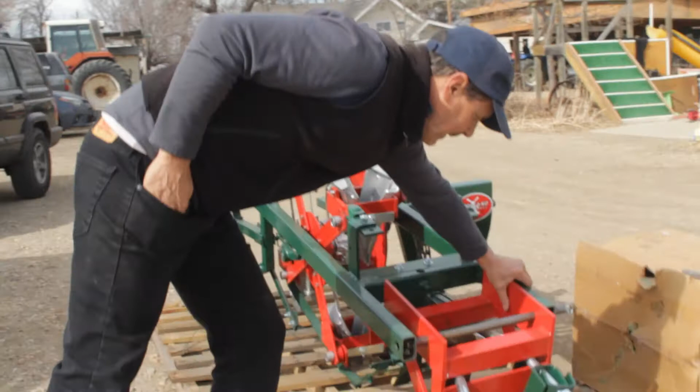Pretty simple process, we just picked it up. Leah slid the bar through for me. That's what it looks like. It's got some slop in it like this, it's got a little bit of rock to it. And as the instructions say, put in the cotter pin, farmer. We'll hook it up to the tractor and see if there's any modifications.

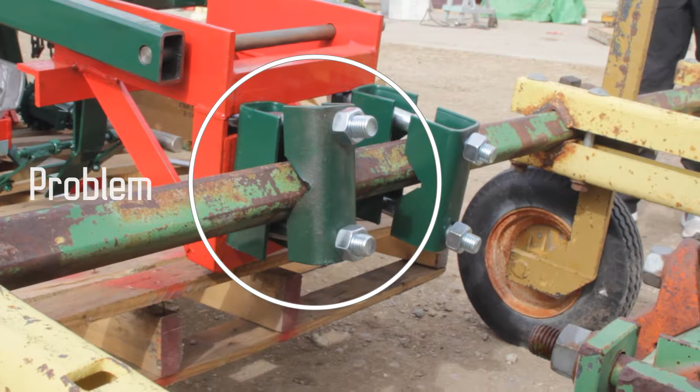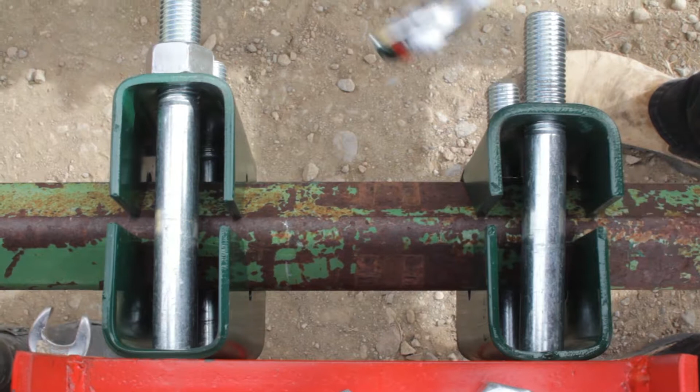This is shorter than that. That's why this one's bottoming out. It's probably upside down. Upside down? What do you mean? This is probably supposed to be up here, and it's supposed to be symmetric. Here, are you sure? Yeah. Oh, is there another piece?

Well, like all good projects, there's something always wrong. It looks like Holland shipped us 2 different clamps. So I'm gonna have to get some washers to stack it up here to take up the slack. I don't think it's any big deal, but this left side's giving us some static, so we'll get her rigged up and get her lifted up.

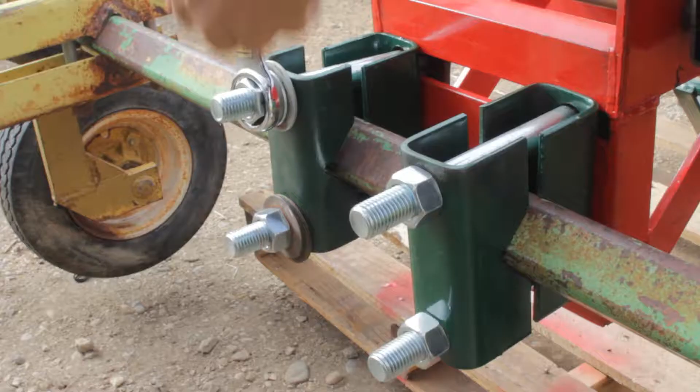Well, I found a couple of washers, got them put on the bolts and got her snug down. Now it's not tight yet, we're not going to torque it way down, but now we're going to lift it for the first time and see how it works. I'm not quite sure about this hitch, but we'll give her a go.

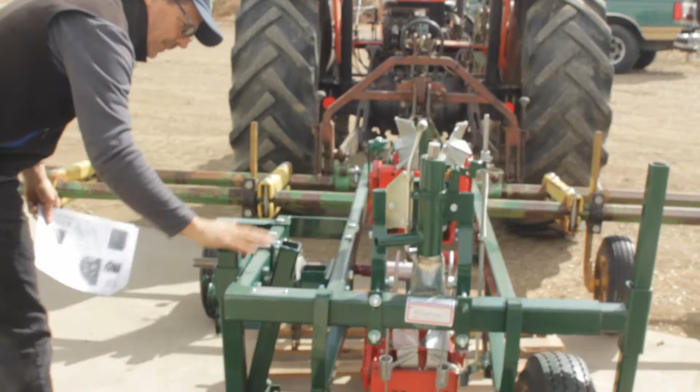Okay, step 3, rear axle drive wheel, see diagram A. Alright, that's the rear axle drive wheel. So there's 2 rectangular tubes that go into a couple of clamps, and we're going to have to pull that off. Alright, I think it's these 2 things right here, and this thing. This is some kind of drive mechanism, I guess.

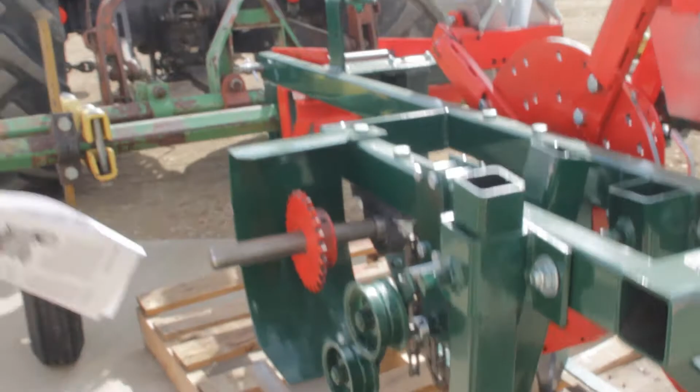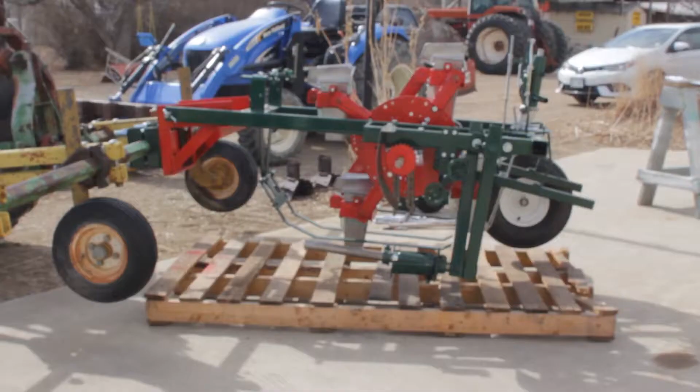Figure that out. Alright, so I'm going to start up the noisemaker and lift this thing up and get these pieces out and see if these directions play out. Remove the left rear axle from the unit frame. Yeah, so that's going to have to come out of there.

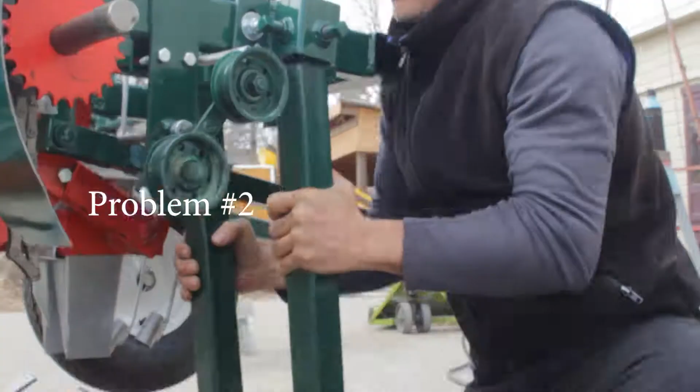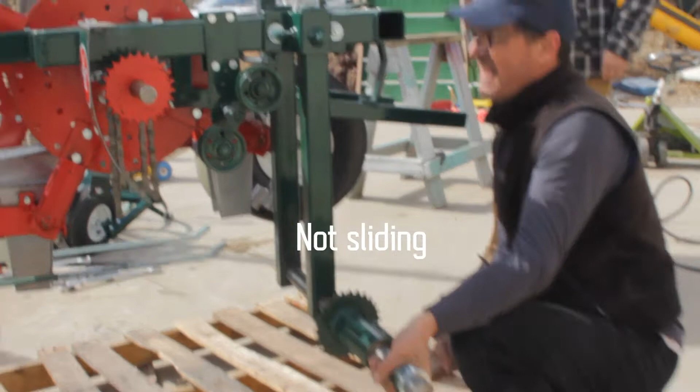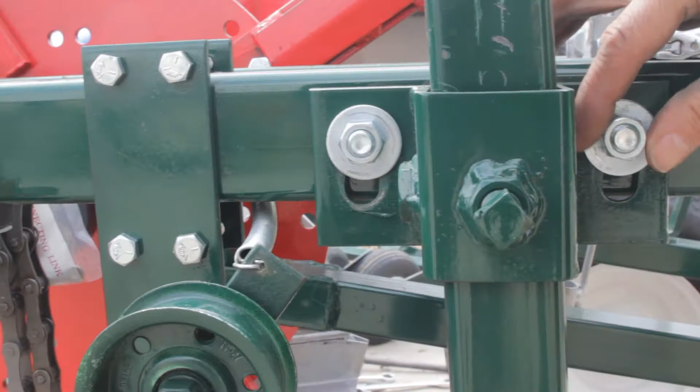Wow, yeah, slipped them in. Also figured out our dilemma with these sliding of the post through the clamps - these things are fixed to the frame with these 4 bolts. We loosen these 4 bolts, so now these sleeves can align with the orientation of the post and slide right up. So I stopped cussing Holland after I figured that out.

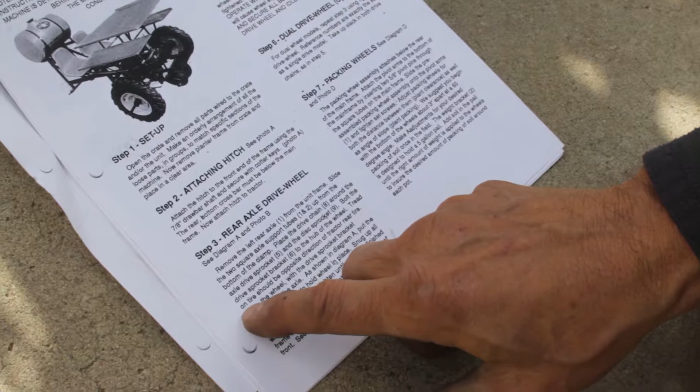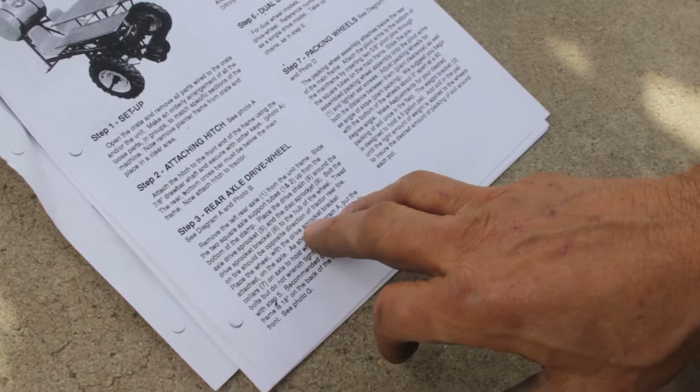Remove the rear axle, slide the 2 square axle supports, 1 and 2, up from the bottom of the clamp - pound, beat the crap out of them. Place the drive chain around the sprocket and the disc. Bolt the drive sprocket bracket 6 to the hub of the wheel. Tread on tire should be in the opposite direction of the rear tractor wheel. Place the wheel with the drive sprocket bracket attached onto the axle.

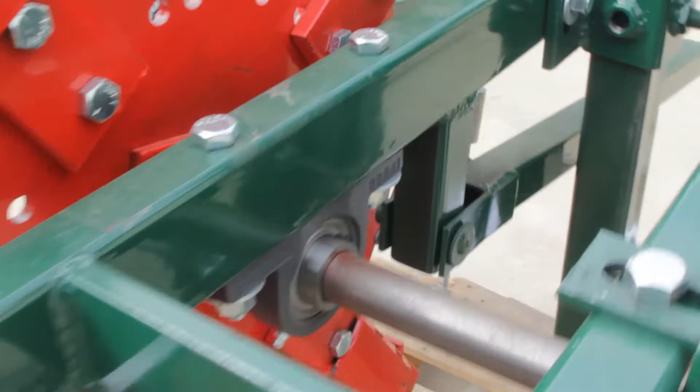Okay, so this is all this stuff right now. Alright, this must be the drive chain, and that's the master link. Deal with that later.

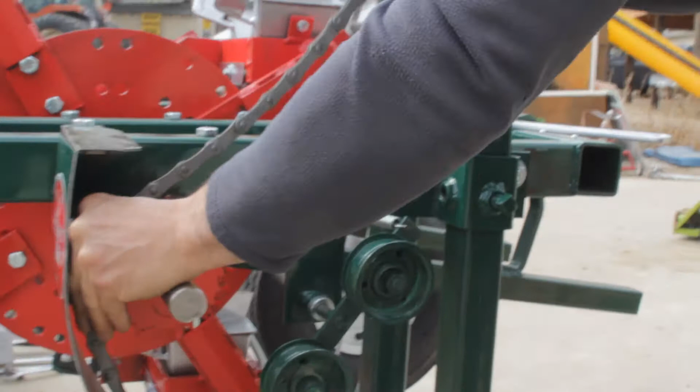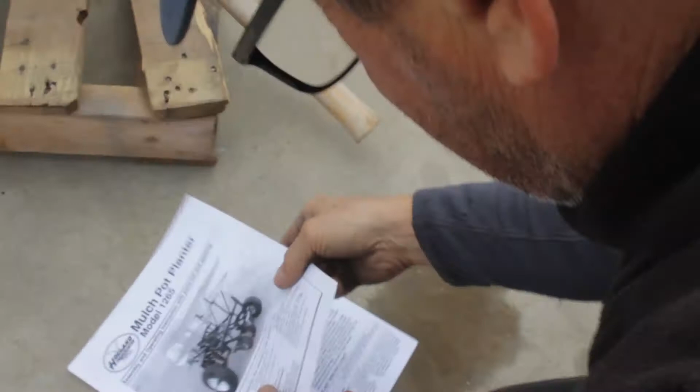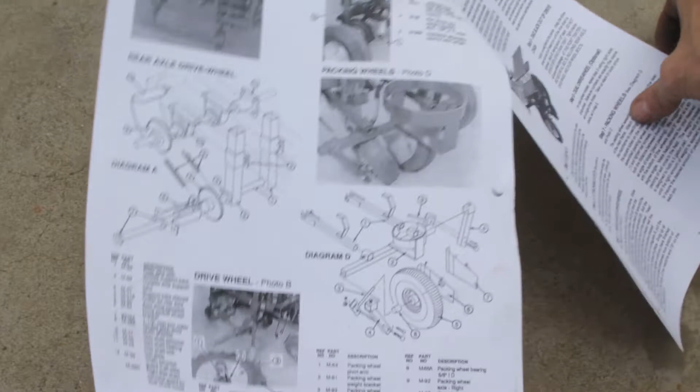This is some kind of chain tightener. It doesn't show a chain tightener in the plans here - see, it just shows a straight shot across there. It's got a lot more posts sticking up on the top than we've got, so we're gonna have to go up a long ways for it to reach through there, so we'll do a little more adjusting here. So we got the chain hooked up. This tensioner is not shown in the instructions, so I'm not quite sure.

I think the chain evidently sets the length of all of this and this angle, and this is what we ended up with. This is the combination that got us around this. I'll probably end up taking this tensioner around it after I get everything secured down, but I'll just take this off and thread it through.

And I think that's the way it's designed with these collars. You loosen that, slide it out, rotate it, bring it back, and let it hold the tension in the chain. But I think this sets the height. So I'm going to go ahead and snug these all down and start working on that wheel.

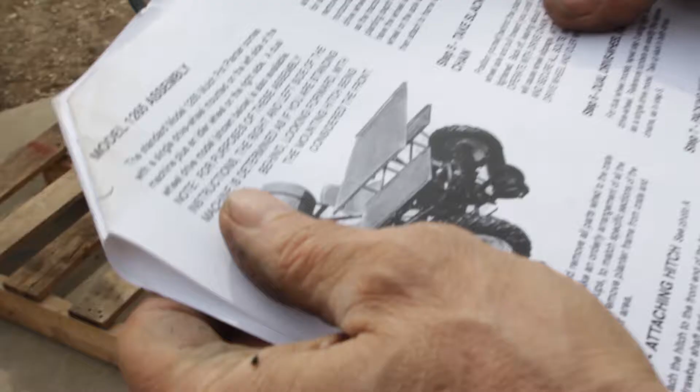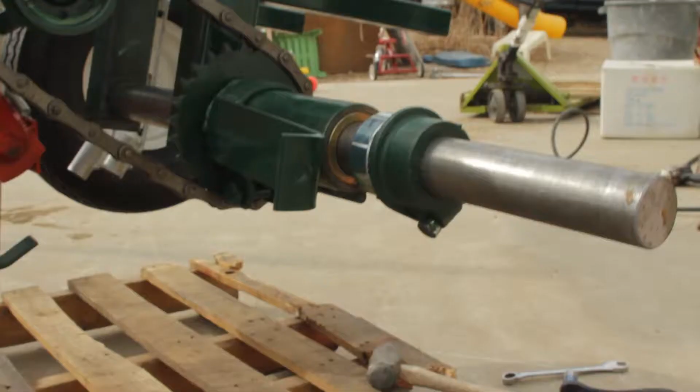Now, where this is on the axle, I've just got it centered up with the center line of my tire, and that seems to be appropriate. That seems a little canted though, doesn't it?

I think we're going to have to do some cattywampus adjustment here. See how it's kind of toed out there? We'll have to adjust these bars with these pieces and get it kind of lined up. But I think in principle it's pretty well lined up, so it'll be driving right in the tire pack. So I'm just going to go ahead and tighten this tire down where it is.

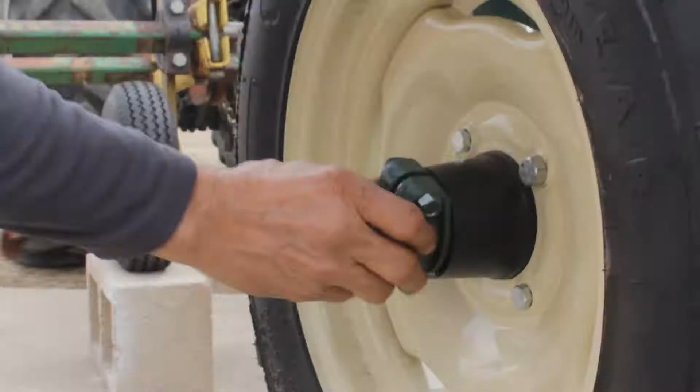Yeah, how about that? And then you drop the plan in.

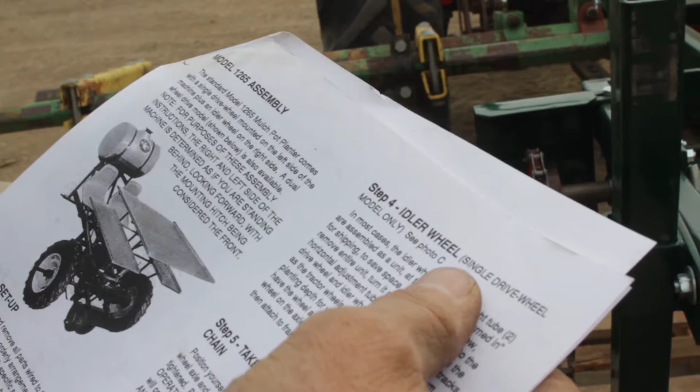Alright, idler wheel. I don't have an... let's see, idler wheel, single drive wheel model, see photo C. So I've got that idler wheel over there. In most cases, the idler wheel and the upright tube are assembled as a unit at the factory.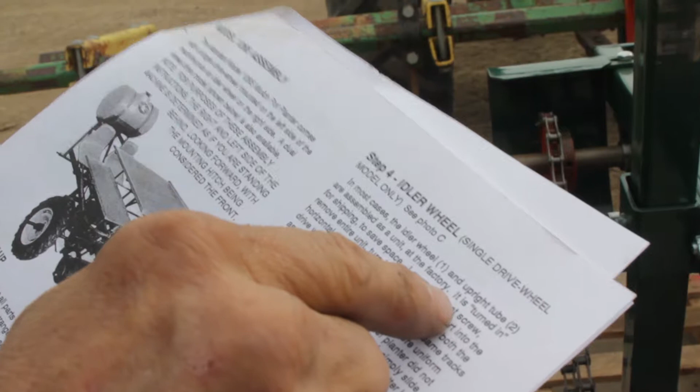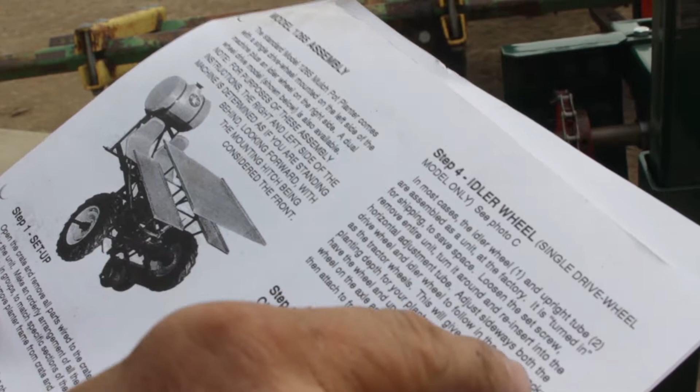It is turned in for shipping to save space. Loosen the set screw, remove the entire unit, turn it around and reinsert it into the horizontal. Adjust sideways on both to follow the same tracks as the tractor. Yeah, that's right. Okay, got that part.

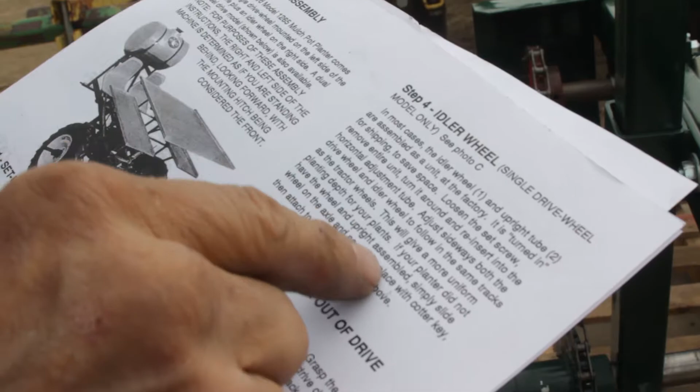This will give you a more uniform planting depth if your planter did not have... okay. Alright, I don't know if that's the right height or not, but close enough for now.

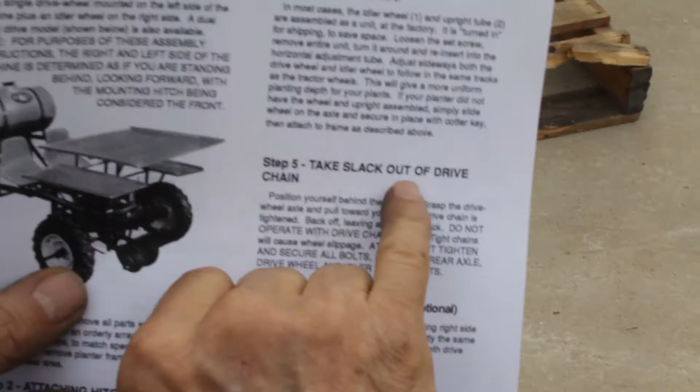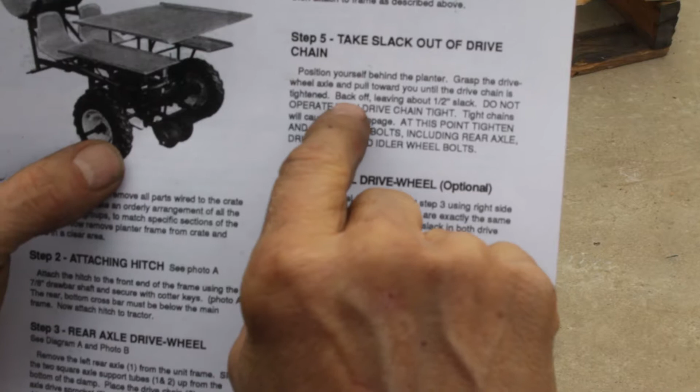Take slack out of drive chain. Position yourself behind the planter. Grasp the drive wheel axle and pull toward you until the drive chain is tightened. Back off about a half inch of slack. Do not over tighten the chain. Over tightening chains will cause wheel slippage.

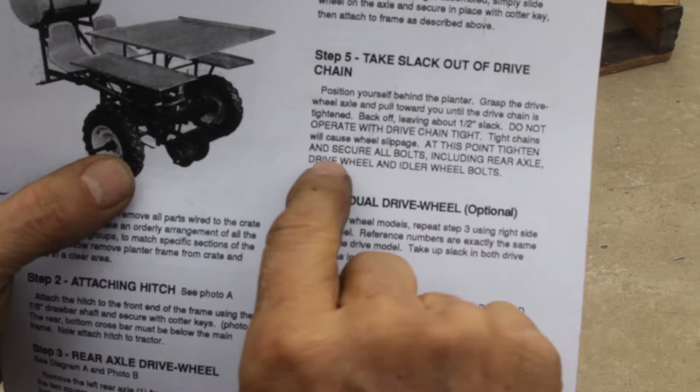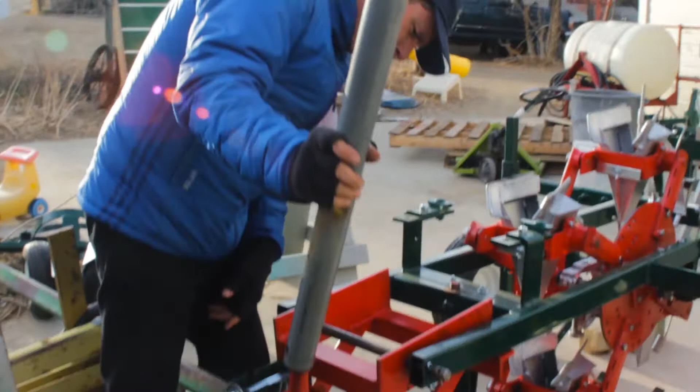But so back here we had trouble getting the chain tight and keeping the wheel aligned. It was kind of toeing out a little bit, which is a little bit concerning. So let me come back here and show you what I did to, I think, prevent that toe-out issue that we were having.

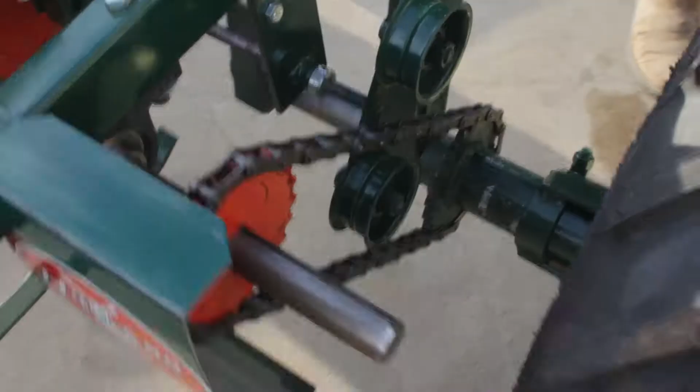Okay, the instructions say, let's keep about a half inch of slack in there. So I think that's probably what they mean by a half inch of slack. The other thing I noticed is that...

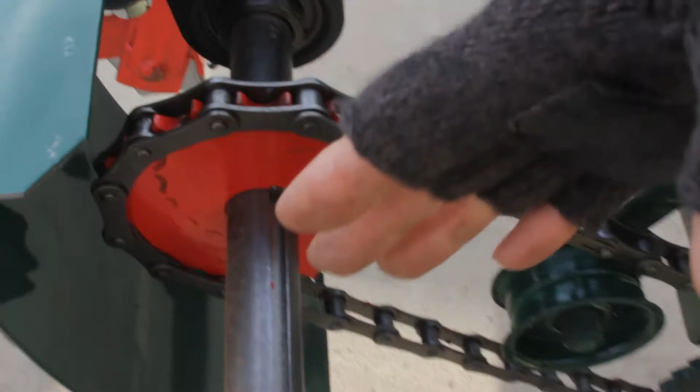...translate on this axis, and I think the axle, I'm going to move it out a little bit, and then move this out a little bit too, because it's tight in against there, and I don't have any slack. So we'll make those adjustments off camera.

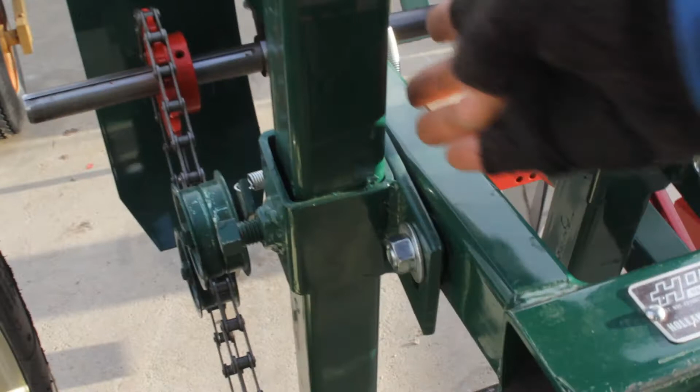But one of the things that was happening is when I tightened these clamps down, I was drawing everything in.

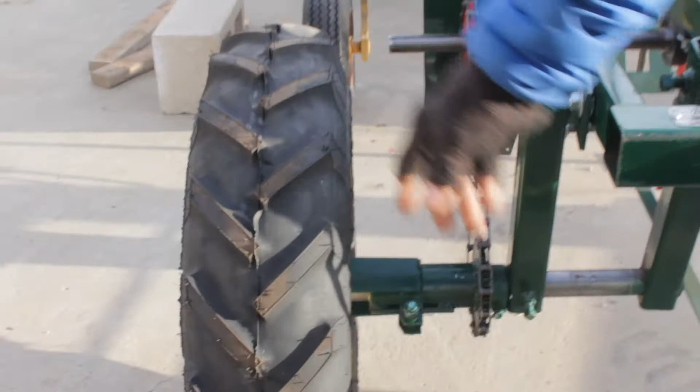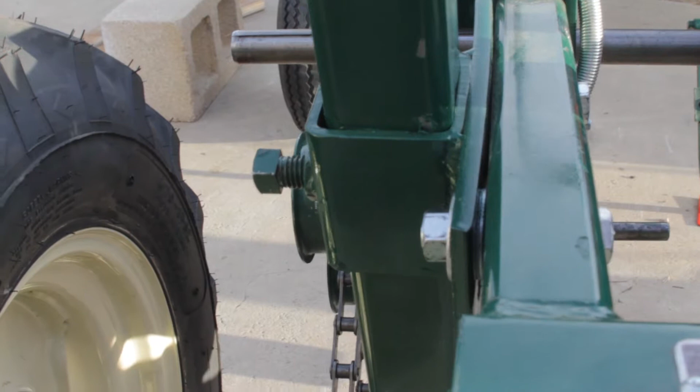So now if you sight down, it looks pretty straight. If you look at these flat bars here, they look a little bent to begin with, and I don't know if that was by design. Maybe my spacers will end up coming out, but right now that's the way it looks, and everything's tight and holding together.

It's going to finish torquing down these bolts in the front, and we'll get on to packing wheel install, step 7.

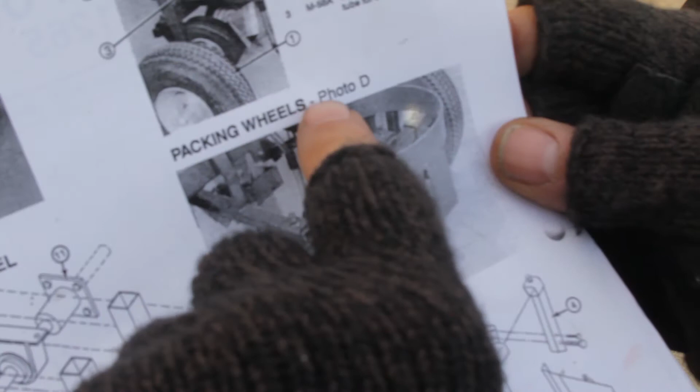Packing wheels, photo D. Okay, diagram D. Okay, packing wheel, see diagram D info.

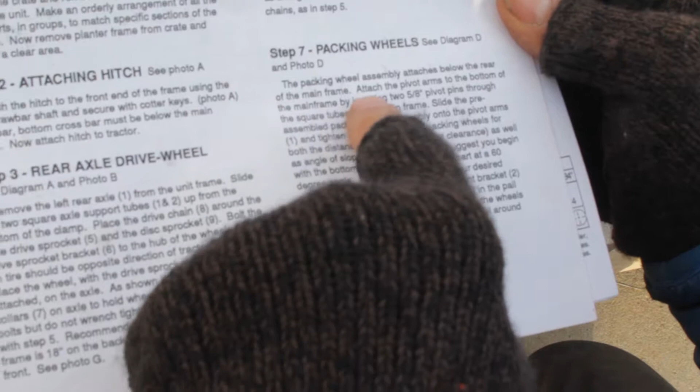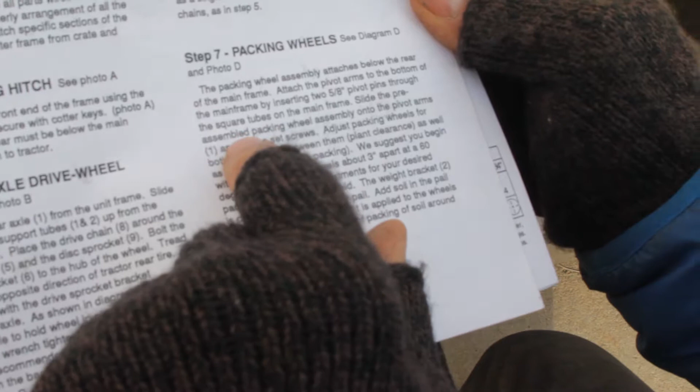The packing wheel assembly attaches below the rear of the main frame. Attach the pivot arms to the bottom of the main frame by inserting two 5/8 pivot pins through the square tube on the main frame. Slide the pre-assembled packing wheel assembly onto the pivot arms and tighten set screws.

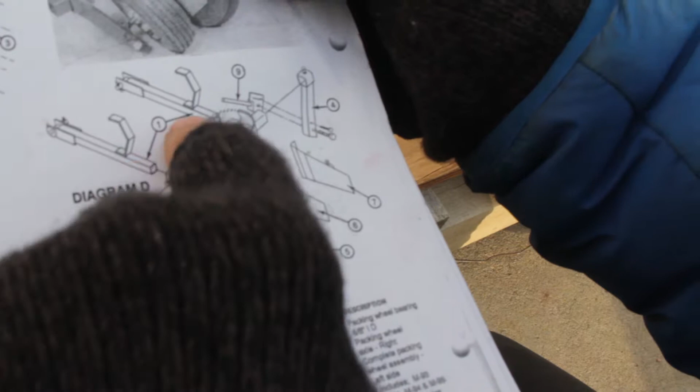All right, I think I know these right there. Okay, those two things are right here, independent. Adjust the packing wheels for both distance between them and plant clearance, as well as the angle of slope.

For plant packing, we suggest that you begin with the bottom of the wheels about 3 inches apart. I think that's about right. At about a 60-degree angle. Make the adjustments for your desired packing soil once in the field.

The weight bracket, this thing, we'll put a 5-gallon pail in there. Add soil in the pail until the right amount of weight is applied to the wheels to ensure the desired amount of packing soil around each plant.

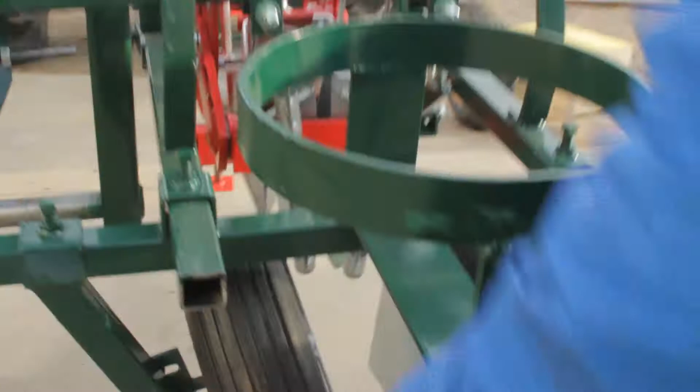So I think this is sort of a real-time adjustment that we'll do. So I'm just going to go ahead and cinch this down so it won't go anywhere. Let me run and get my crescent wrench.

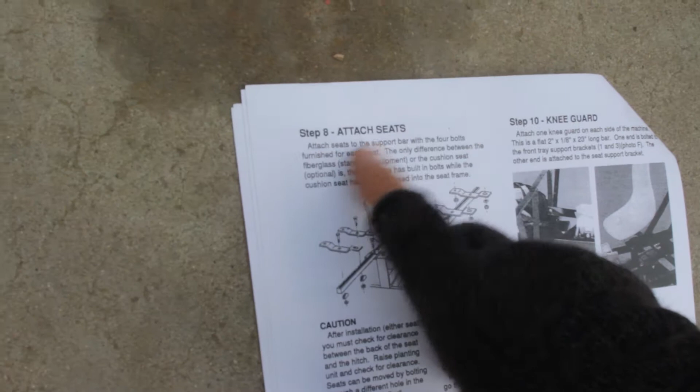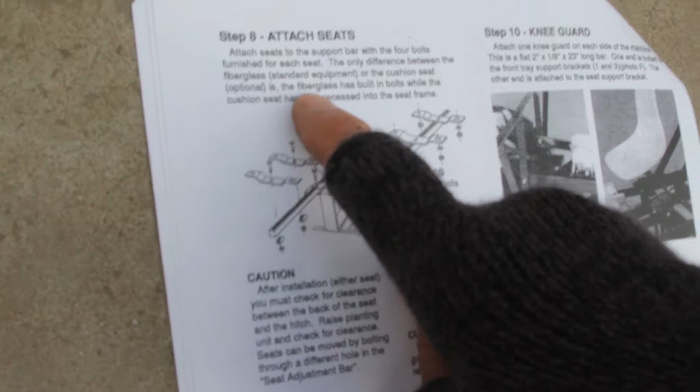Attach the seats. Step 8: attach the seats to the support bar with 4 bolts furnished for each seat. The only difference between the fiberglass standard equipment and the cushion seats optional is the fiberglass has built-in bolts, while the cushion seats have nuts recessed into the seat frame.

Alright, that should be pretty straightforward. That's going to be a lot like the other one that we had. So we use these fiberglass seats.

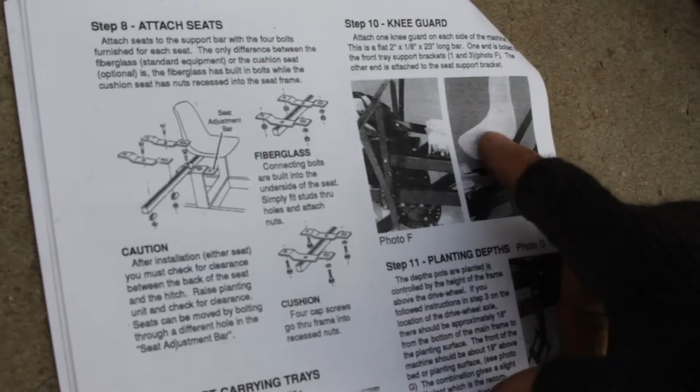When they sit in the sun for a while, they start to kind of break down and get a little itchy, so we always put those lawn chair cushions on them. Makes it a little bit more comfortable. So anyway, we'll stop filming, get this infrastructure put in, and come back when the seats are on.

Like soda water? Yeah, he just lost his buddy Milo. He had Milo for a long time.

Alright, took me a while to figure this out. You pull these little black protectors off, and looking at this, it's not a 1/4-20 screw. What the heck is that? It was just some kind of protection. When they molded these screws into place, I guess they put these in as inserts into the mold when they shoot the table or when they shoot the chair. So I think it's a kind of interesting thing.

It doesn't say anywhere in the instructions to do this, but we're smart, so we figured this out. Anyway, so we'll get these mounted up and put on there, and maybe resume tomorrow, because for Colorado, it's supposed to be kind of warm in February, but it's been cold. I think next week it's supposed to be below 0. Something coming in from Nebraska. Woo!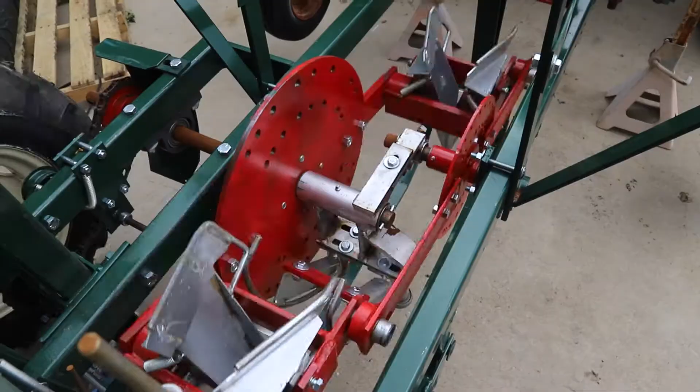We took a couple of the planting spades off because we're only going to be planting on 42-inch centers when we do this hemp, and I can see that there's something wrong already, but that's okay.

But the one thing that we noticed about this thing, and Holland, you need to think this through better, is that there's no footrests, right? So you jump up there and your feet hang down, yucky.

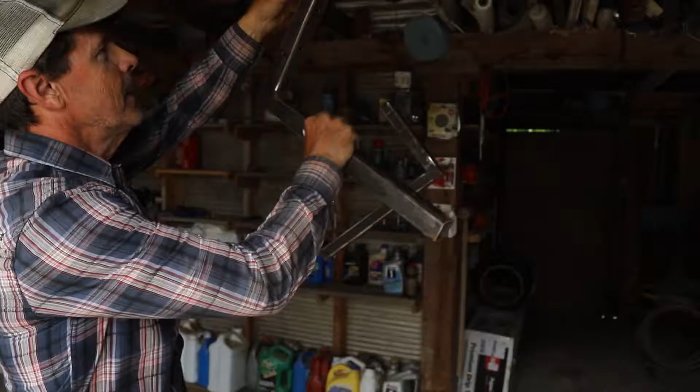So I got some L brackets that my son gave me from a construction job, and he made some great foot brackets. I'm getting ready to paint them, but basically, you know the routine, I just drilled a couple holes and a backing plate that match them. I'm going to prime it and paint it so it looks official.

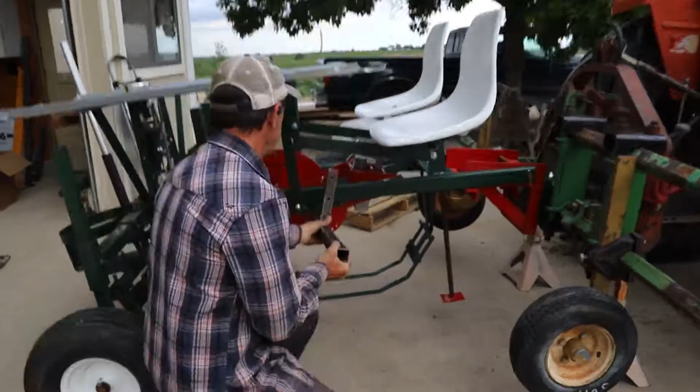Boom! Look at that, footrest. So when you're planting hemp plants, 9,000 hemp plants, then you'll feel a lot better. Alright, so we'll get these painted up, we'll get them attached, we'll get the water tank on.

This has to be moved to the other side, and then we're going to put little rails out here to put a car seat on so my granddaughter, Olivia, who's 2, is that right? Is she 2? I think so, yeah, 2. She'll ride in the car seat and her mommy will ride here. That'll be kind of fun to watch.

Alright, and we're just putting some finishing touches on these foot rests for the planter.

And this is an EPA and OSHA certified paint booth. If you don't believe me, well, you can always ask my buddy Charlie.

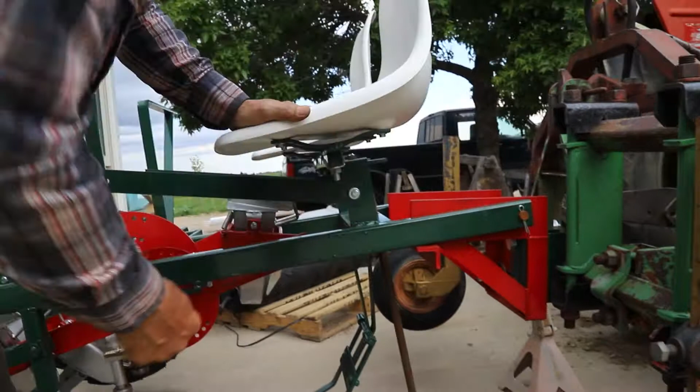Alright, so we got the seats on. If you remember right, there were these little molded nubs in there, but we're smarter than the nubs, and they just pulled right out. So then I was able to get these seats mounted. They're fiberglass, so if they sit in the sun long, they're going to get all crusty, but I think we got them right. So we're going to put little cushions on there that we have on some of our lawn chairs.

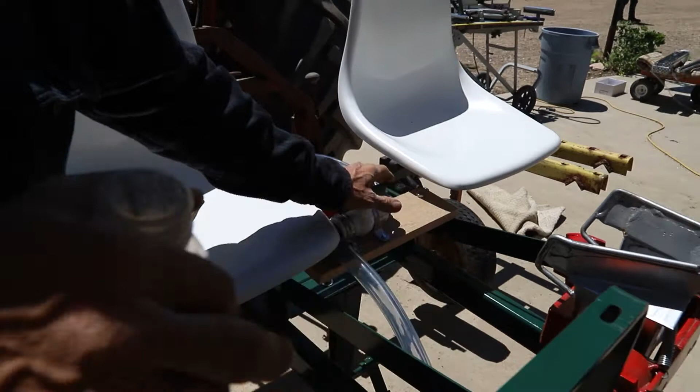3 days later. Okay, well, I think I have the thing all together. I don't have the steel trays on top because I still might have to do some debugging in there for height setting, and it's a lot easier to work without those trays on. But like I talked about earlier, I got the water barrel up on some stilts just to get a little more head going into this valve. And then I've got a shutoff valve here because it almost always fails when the metering valve is open. So that's the metering valve there. So whoever's planting can reach up here real quick and shut that off and stem the flow of water, because as you can notice, it's a baby little tank here.

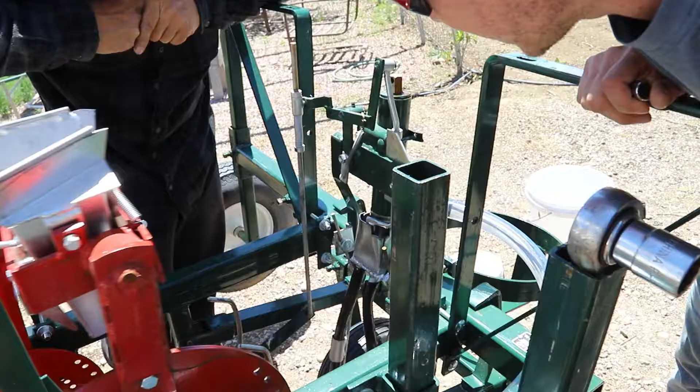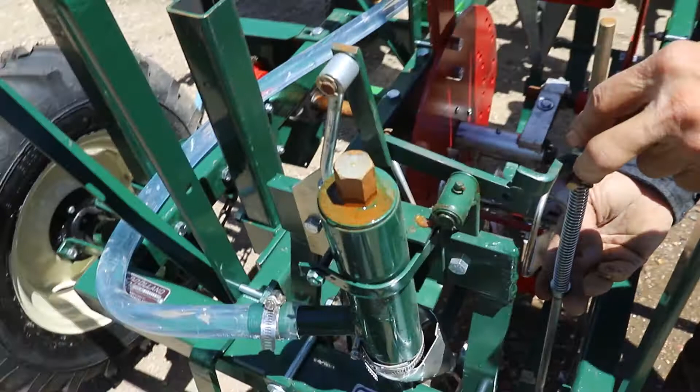Okay, sorry about the noise in the background, but we're debugging the metering valve here. We're filling it full of water right now for the first time. So when I come over here, this little valve works on a plunger, so it plunges out a metered amount of water each time. And when this comes back down, it's not seating, so it's leaking a little bit. So this spring is designed to put a little more tension on that. I was lifting up on that. I need to shorten the spring by about half, and that should shut the water off into that thing. So we'll see.

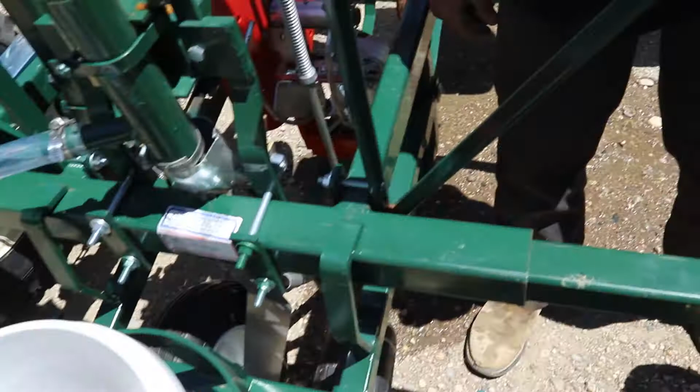YouTube etiquette training. Oh, we're YouTubing. We have YouTube etiquette training classes. Hi, that talk about when the talent, that'd be me, is talking, then everybody else is quiet. And that's rule 1. Got it, guys? That's YouTube etiquette. Do we need makeup? Lights. We need lights. All right, well, you're doing great.

So we got an epic understatement of physics here. We've got 55 gallons up here. What is that, 8 pounds a gallon? So 55 times 8 is 440 pounds. It's acting like a big lever arm, and it's way too heavy. So we're going to turn it around so the center of gravity of that weight is on this side, so the planter doesn't get all cattywampus. It's gotta be centered. We think it's going to be centered, so I'm going to move all of that to the center. Now the problem is that I wanted to be able to see it planting.

And I don't know if that water barrel is going to be... but look, I got the gauge wheel completely off the ground. The frame's not even stiff enough to hold it. So what we'll do now is we'll take it back up. We'll drain this tank, 55 gallons of water, water some trees, and then move it all over, and then try again.